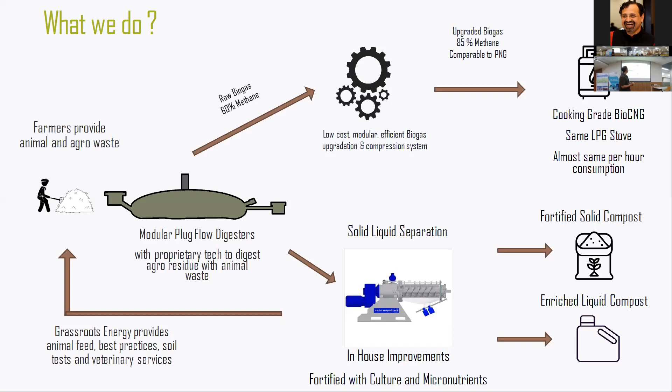So this is basically what I spoke about. The bio-CNG potential in India is untapped because of precisely the reason I mentioned—because it's unviable to transport low-cost feedstock to a large centralized plant which can reliably convert it into biogas.

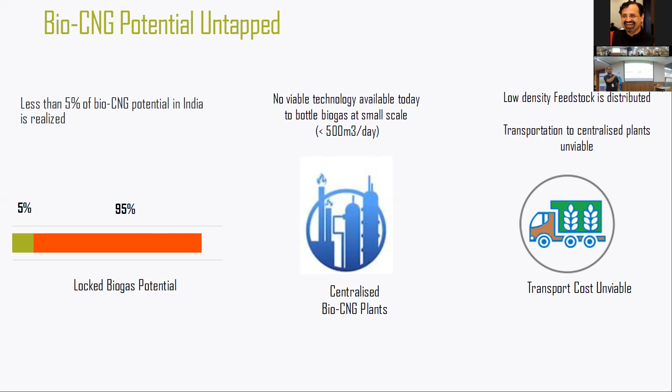Next one, please. So we bring in a disruptive system which can actually work at scale as small as 100 meter cube per day, profitable, economically viable. The capex is 1/4 of the industry standard cost, and obviously it's distributed—now you can set it up close to the point of waste generation.

When you say 1/4 of the industry cost, it's primarily based on the calculations for small size. So if a 1,000 meter cube plant is available for say X, I'll convert it to a 100 meter cube plant by saying X divided by 10, and now I'll compare it to the cost which I get.

Because they don't scale down, if today you buy it, it will not be a geometric division by 10. These plants are available at costs which are much higher. So it becomes literally a non-scalable business, because of which they are not commercially viable.

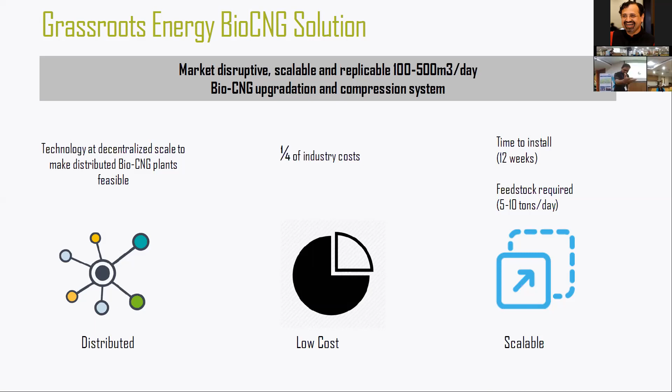I'll be speaking about the biogas part first, and then I'll come to the compost. Let's go to the last slide.

This is one of the most important innovations we did in upgrading the biogas. Biogas basically consists of methane and CO2, which is why its calorific value is low. If you can somehow get rid of the CO2, you have pure methane, which is natural gas and can be sold at a pretty high price, going into vehicles at 50 rupees per kg at the very least. So that's a good number. Now the problem is, how do you get rid of the CO2?

Commercially viable technologies exist which operate above 1000 meter cube per day, more viable above 5000 meter cube per day. We have a patented solution using rotating discs as a mass exchanger, creating a huge surface area of flowing water because the discs are hydrophilic. A water surface forms on both sides of the disc, and this huge surface area absorbs CO2, since CO2 has good solubility in water. We do the same thing at the bottom using atmosphere, because the CO2 percentage in the atmosphere is negligible, the partial pressure is practically zero. So all the CO2 is released back again because of the huge surface area. The same technology is used both in scrubbing and in regeneration of water.

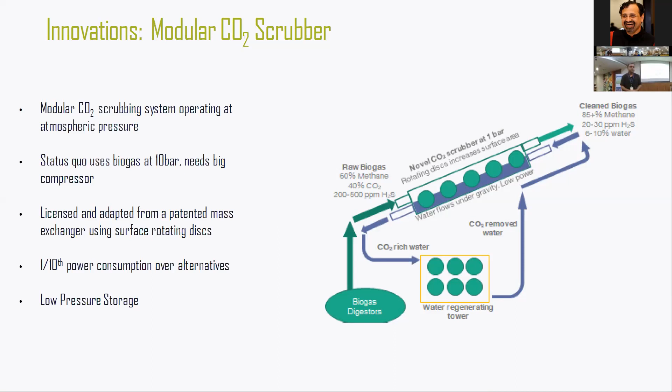These are images of how it works. The first image is the scrubber, the second is the regenerator. Water flows through these channels; this has been opened to show the discs. It's airtight because you don't want the biogas to be lost. That one is always open to air because we are regenerating. This gives a basic sense of how it looks.

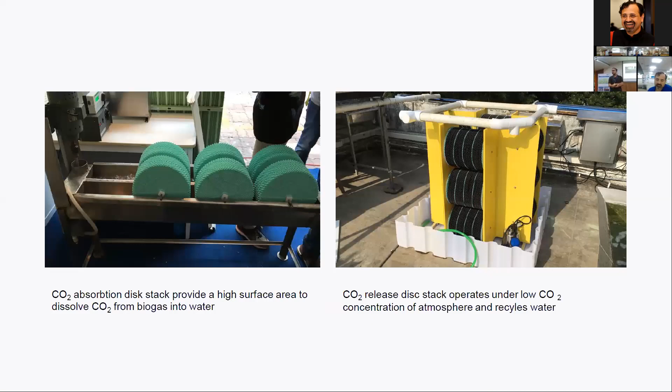One specific thing I wanted to mention is we are also working on a technology right now. The upgraded gas is typically compressed and stored at 200 bar in cylinders. We are working on an adsorption technology to achieve storage at something in the range of 35 to 50 bar. Rather than compressing, we'll be adsorbing. It's traditionally used in hydrogen storage, but it can also be used in methane storage. We are almost done with it, but still need to launch it.

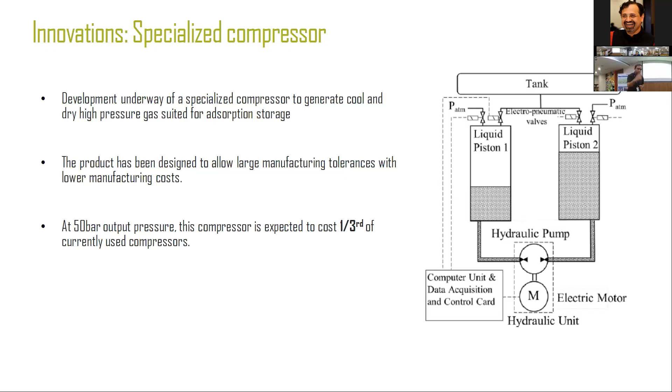One of the innovations we did with our plant was addressing the lots of issues we had generating biogas in winters. We operate in the northern part of India. So this is a very simple innovation.

We run engines which operate on biogas. A lot of processes on the field generate a lot of heat, so we designed our own heat exchangers to capture that waste heat, which is now pumped into the digesters. You can see some hot water—this is from our site. I couldn't get a better photograph, but this is the hot water generated on site, which we use to feed our digesters, and that helps us maintain the production of biogas, which is very critical.

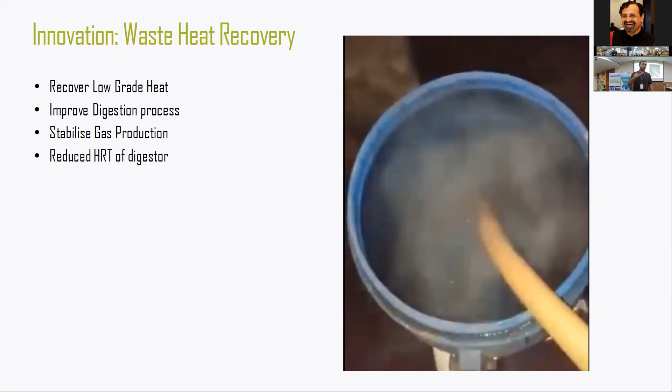Although this might seem pretty small, your biogas production could go up by 10 to 40%, or it could go down by 10 to 40% in winters—which we do not allow by adding heat. So although it might seem small, you can imagine the economics of 10 to 40% of one of your product outputs. Very critical for us.

So that heat comes into our digesters. We have also worked on some specific internals. We don't build these digesters ourselves—we just buy them off the shelf. They are plug flow digesters available off the shelf, but these digesters are designed for dung, not for something like agro waste—stalk, paddy stalk, or maize stalk, etc.

So this stalk needs to be pre-treated. We have developed—sorry, dung, cow dung, not necessarily cow dung but dung, any dung—however, by pre-treating the paddy or other agro waste stalk, you can use them in the same digesters. And pre-treating is not a big deal; it's available, a decade-old technology.

But the amount of energy and the capex of the status quo pre-treatment plants make them financially unviable. So we built a biological pre-treatment plant, which takes a little bit longer, but because we are so small we don't mind it, and it does it at pretty much zero energy cost. So the OPEX again goes low, and that's the fourth innovation we bring in.

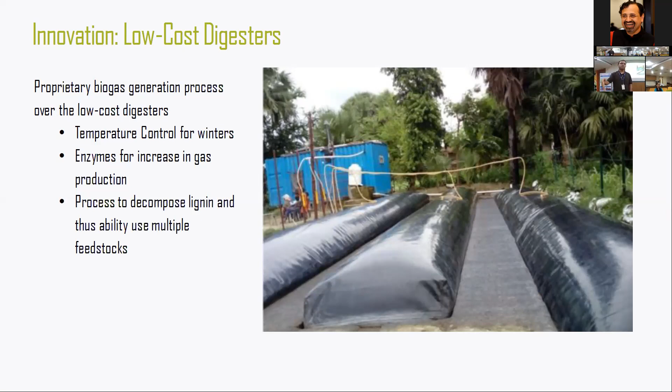The first one is the mechanical part where we shred it, simple shredding. To keep the capex low, at some of our sites we don't even buy the shredder—we rent the local shredder, which are easily available, and we shred it so it's a little smaller in size. That's the mechanical part. Then the first biological part A, and then biological part B.

One of the most interesting things is we operate in very rural and peri-urban areas outside the city. CNG demand is unmet everywhere. People don't drive CNG cars, or have CNG autos in villages, not because they don't want to, but because they don't have CNG. CNG is cheaper than diesel. Everybody would want to drive a CNG vehicle if it were available.

Second, all agricultural instruments almost all use diesel, and the smaller ones use petrol. For example, you would have seen small Honda engines used for sugarcane extraction. They're on petrol because it's very difficult to design very small diesel engines, so you need to design petrol engines instead. All of them can be retrofitted to run on gas, much like any petrol car engine.

So the possibilities are very interesting of what we can achieve by supplying gas in areas where it is traditionally not available. Even today, several major big cities in India don't have access to CNG, and I don't see CNG hitting rural markets anytime soon. So whatever CNG we generate, we will always be in a market with unmet demand. It's a very interesting place to be in, having a product in a market where there's unmet demand.

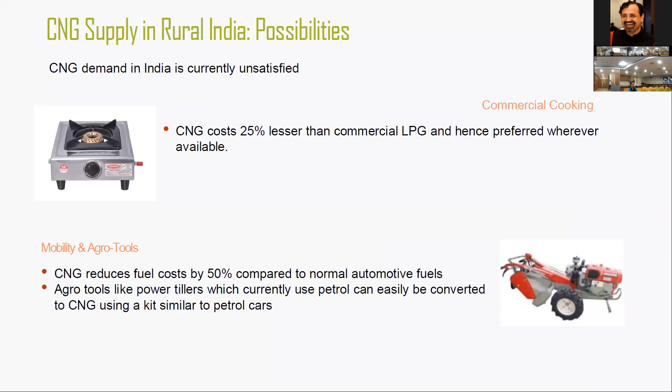Do you have piped natural gas at home? For that it should be... no. What is piped natural gas? It's not CNG, it's NG without the C. It's natural gas which is not compressed, it's piped, it's at atmospheric pressure. So if I bring this CNG to atmospheric pressure, it becomes natural gas which will run in a normal stove.

Natural gas at home, no it won't be used directly. A compressed gas is not used directly, there will be a reducer. In fact, I didn't mention that since we are building technology to operate at lower pressure, we have a distinct advantage.

Every CNG installation needs a pressure reducer, so you bring the pressure from 200 bar to something like 5 bar to 1 bar. There is a reducer in the line because you'll be using the utility only at 1 to 5 bar. Because of the Joule-Thomson effect, that reducer experiences very low temperatures and thermal shock, so they become very costly. The Joule-Thomson effect is much lower when you bring it from 35 bar to 5 bar than when you bring it from 200 bar to 5 bar. So the reducers could be much cheaper in our case, where we are trying to achieve it at much lower pressure.

Again, that's a huge capex, and a very critical one, because one of the biggest issues is who will pay for that reducer - whether the end user pays because it's on his premises, or the utility company pays. When the price is like 70,000, both of them debate. When the price is 5,000, we agree very easily on some number - okay, you pay half, I'll pay half, let's agree. I cannot tell you how critical that is to this business: bringing down that capex, which is on the client premises but not owned by the client in a sense, and figuring out who pays for it.

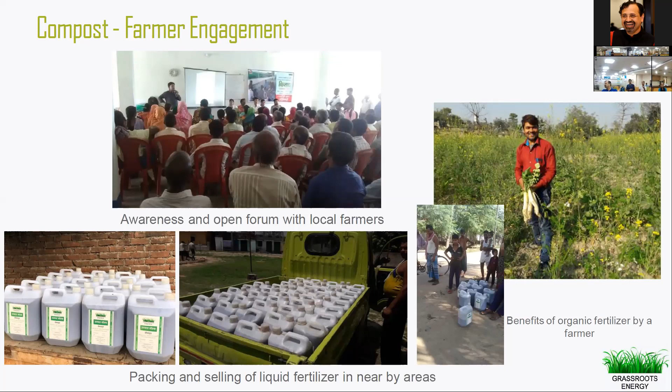When we talk about this liquid compost, how do you provide a controlled quantity? Over-composing is also dangerous for the plant, right? Yes. Next one please.

So we tell them how much to add. We have a chart for which plant, how much to add. If you add more than this, you are responsible. Simple. But do you get a consistent quality of this? We have it, it's okay.

Consistency is relative, right? No, but consistency... I'll tell you, consistency is relative. If I ask someone to add between 10 to 20 liters, if that margin of error is okay, then my product lies between that concentration, double to half. So do I get consistent quality of the product? Yes, consistent enough for me to stick to one checklist, one chart. Minimum, maximum, you apply in this range, and my compost will fit somewhere in that range. So what is acceptable, we fit in that range.

Does it depend on the proportion of the animal waste to the agro waste?

Yes, it depends on a lot of things, and I would like to add one more thing: we enrich it. There is a control process at the end, which we control. So in cases where we need to enrich it more or less, we can do a run based on how much we have got and add something more or less. That gives us some leeway, although not a lot of leeway, because else I could have just taken water and added the ingredient and still have a product, but it doesn't work that way. In fact, it's not only a function of the ratio, it's also a function of what is going in - which agro waste, paddy or maize. That's something we optimize.